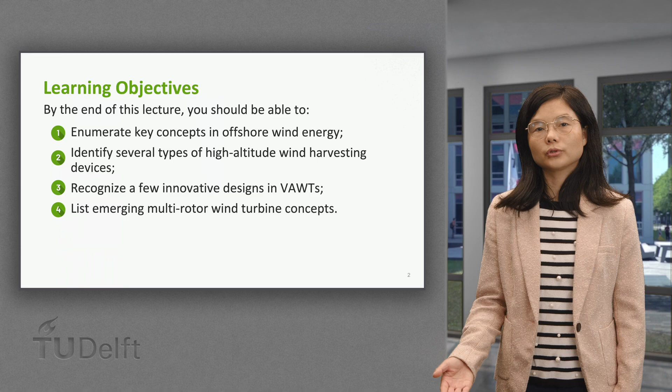In this final video on wind energy, we will discuss some emerging technology in wind energy harvesting. By the end of this lecture, you should be able to enumerate key concepts in offshore wind energy, identify several types of high-altitude wind harvesting devices, recognize a few innovative designs in VAWTs, and list emerging multi-rotor wind turbine concepts.

Wind energy has become a key player in the global transition to renewable power. While horizontal axis wind turbines still dominate today's energy landscape, several emerging technologies are being developed to push the boundaries of efficiency, flexibility, and deployment, especially in challenging or unconventional environments. In this final lecture on wind energy, we will take a brief look at four promising directions: offshore wind, airborne wind energy, vertical axis wind turbines (VAWTs), and the multi-rotor system.

As we learned in the wind resource session, offshore environments typically offer stronger, more uniform, and less turbulent wind due to the flat sea surface. Offshore wind is already a rapidly growing sector. However, it also faces notable challenges, including higher installation and maintenance costs, complex logistics, and so on. Despite these hurdles, continued innovation in foundation design and floating platforms is steadily expanding the feasibility and the reach of offshore wind power.

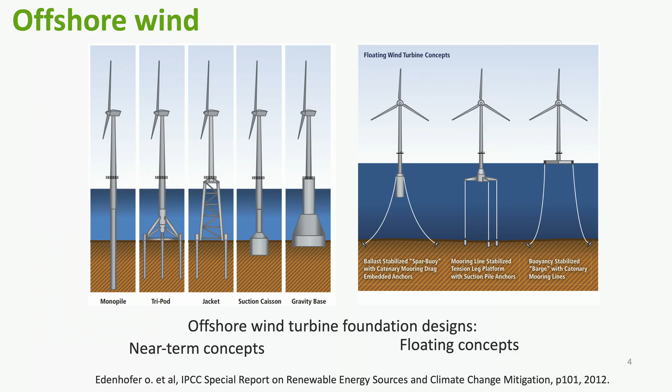Historically, offshore turbines have been installed in relatively shallow waters up to around 30 meters deep, using monopile foundations, which are essentially extensions of the turbine tower. Gravity-based foundations have also become more common. These near-term concepts are shown on the left. On the right, you can see several floating foundation concepts that are more suitable for deeper waters. These include spar buoy platforms and tension leg platforms, which allow turbines to operate in waters far beyond the depth limits of fixed bottom foundations.

Airborne wind energy aims to capture stronger and more constant winds at higher altitudes without relying on tall towers. These systems typically use tethered flying devices like kites to generate electricity either on board or via the tether connected to a ground-based generator. Their key advantages include reduced material usage compared to conventional turbines, access to higher altitude wind resources, and easier deployment in remote or offshore locations. Although still in the early stage of development, several companies have demonstrated promising prototypes as shown in the images on this slide.

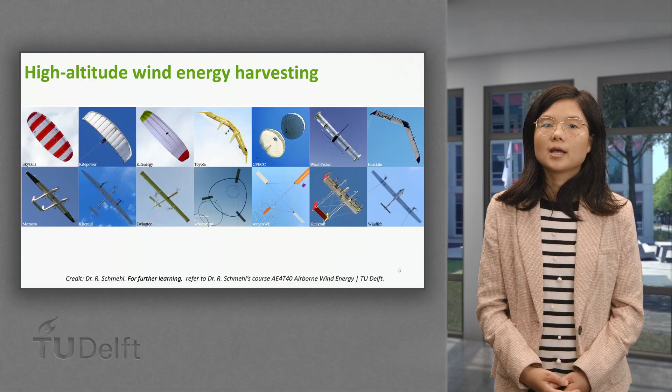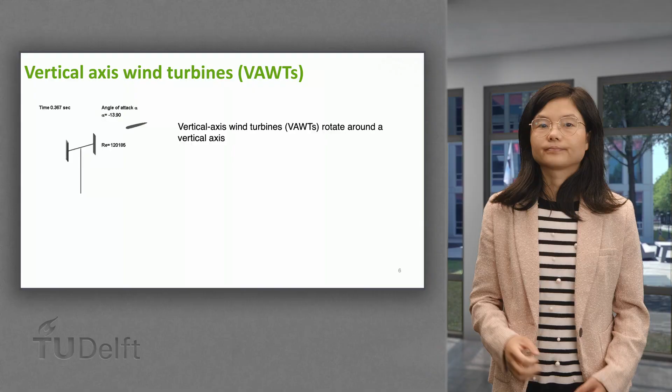Unlike conventional horizontal axis wind turbines, vertical axis wind turbines, or VAWTs, rotate around a vertical axis. They offer several potential advantages. They can capture wind from any direction without needing yaw control. They are less sensitive to turbulence than HAWTs. They may generate lower noise due to the relatively lower rotational speed. These features make VAWTs ideal for urban and turbulent wind conditions. Their lower center of gravity is particularly beneficial for floating applications, with the mechanical and electrical components positioned near the base, reducing both installation and maintenance costs.

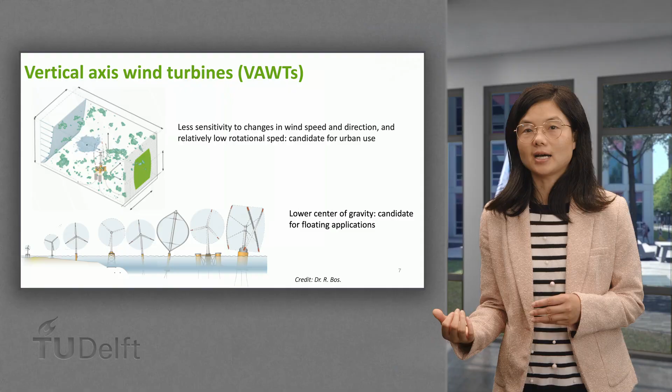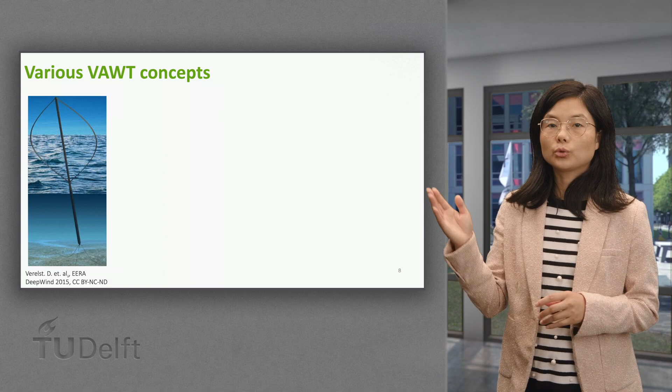This slide shows a few innovative VAWT prototypes. The DeepWind concept on the left uses the sea itself as a bearing to support rotor loads. The Twinfloat designed by Nenuphar in the middle mounts two VAWTs on a single floating platform to reduce cost. The X-Rotor concept on the right, where a large X-shaped vertical axis rotor generates motion and increases the apparent wind speed seen by the two small horizontal axis rotors at the bottom tip of the X-rotor.

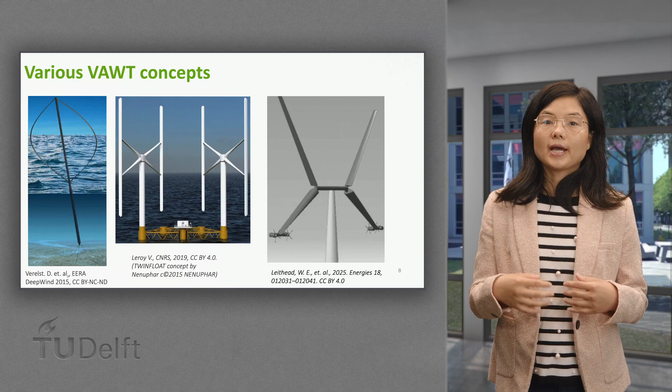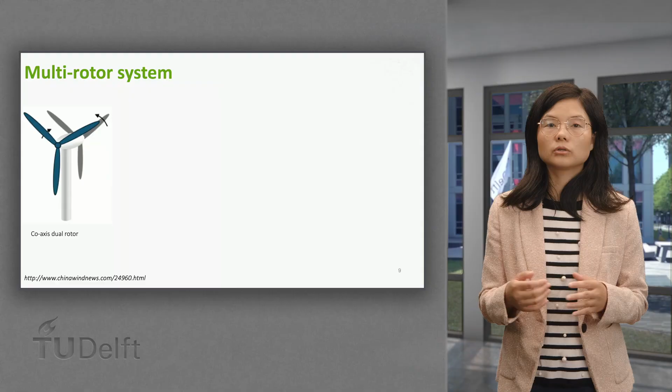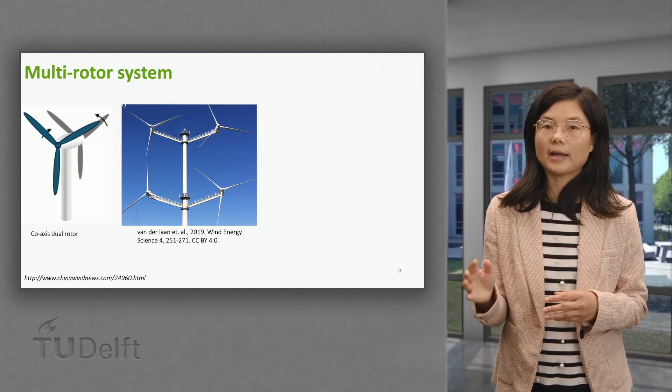Tests and simulations have demonstrated that this configuration can improve power output by up to 2% at below rated wind speed. On the right is the Windcatcher concept developed by Wind Catching Systems. This is a floating multi-rotor wind solution designed to reduce the cost of energy for offshore wind. Its unique layout aims to maximize energy capture in a compact footprint, particularly in deep water environments.

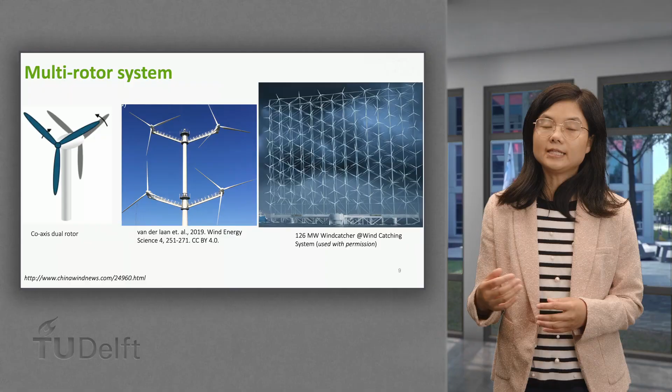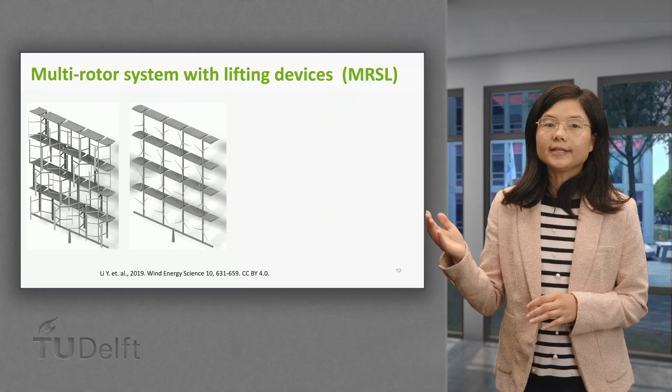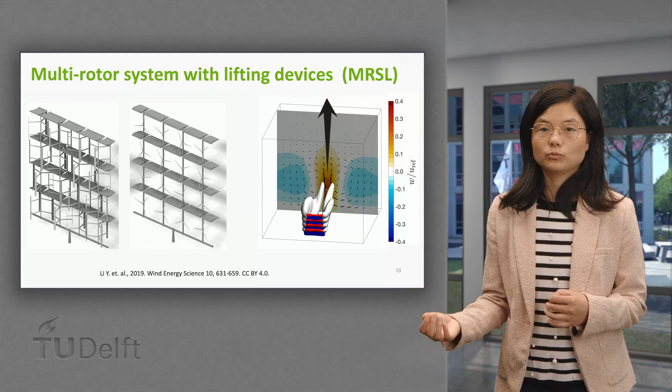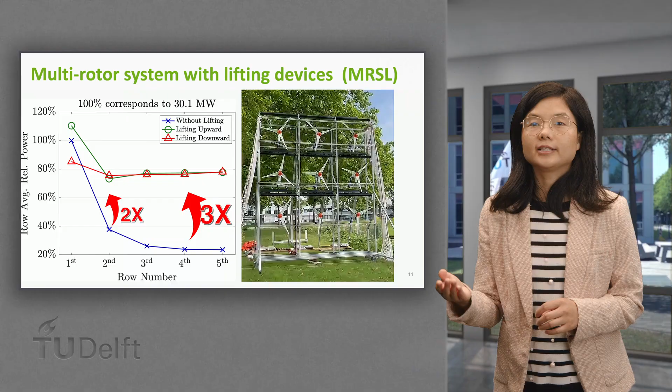Perfectly integrated with the multi-rotor system, our team at TU Delft has introduced the concept of using lifting devices, specifically high lifting wings as shown in the picture. These devices can redirect the wind either upward or downward, depending on their placement and configuration. By modifying the vertical flow field, they enhance the vertical entrainment of high energy flux from the upper atmosphere into the wake region. This accelerates the entrainment of momentum, promoting faster wake recovery and improving overall power performance within a wind farm. This concept has been validated both numerically through high-fidelity simulations and experimentally in wind tunnel tests.

Remarkably, the available power nearly doubles, rising from around 40% in the reference case to approximately 80% after installing the lifting devices from the second row. In other words, power losses due to the wake interaction are reduced from roughly 60% to just 20%, highlighting the potential of multi-rotor systems with lifting devices to significantly outperform conventional wind farm layouts. The video on the right shows a prototype demonstration of such a multi-rotor system with a lifting device.

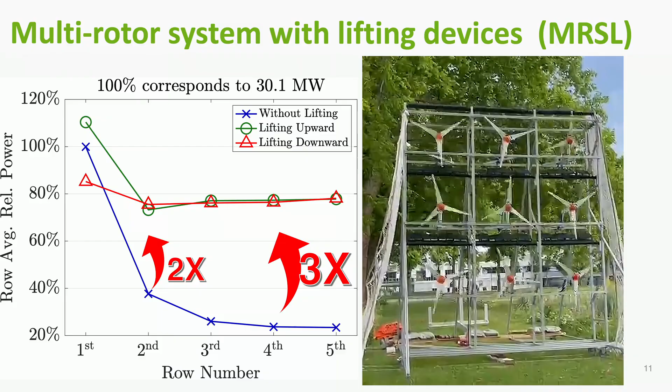In this lecture, we have explored several emerging technologies in wind energy, including near-term and long-term concepts of offshore wind, airborne wind energy systems for harvesting high-altitude wind, several innovative vertical axis wind turbine designs, concepts of multi-rotor systems to enhance power extraction and scalability, and integration of lifting devices with multi-rotor systems to improve wake recovery and wind farm efficiency.